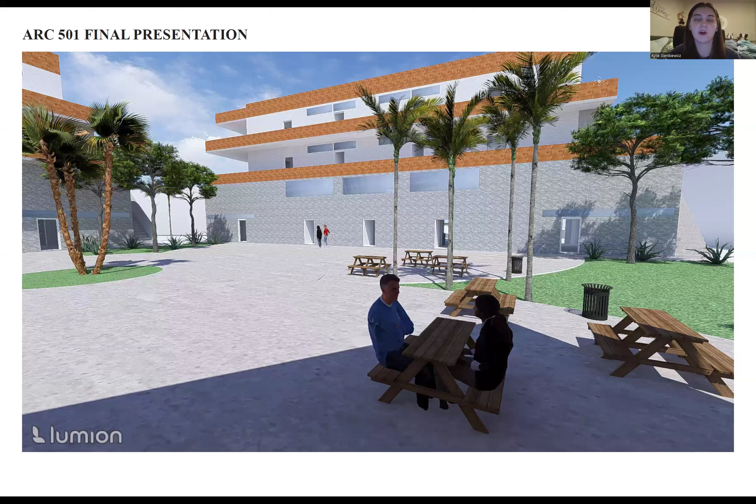Some quick areas of interest that I had in the studio, and obviously links to the studio interests as well, are urban development and housing, and then within that category, the impact of redlining and gentrification on local communities, strategies for equitable urban planning and affordable housing, food security and resource access, and then that is a whole other category of interest for me. Solutions for providing access to healthy, affordable food in underserved areas, community-led resource sharing and support programs.

And then for me, I did a lot of research on the culture in the area. And when I think of culture, I always think of food. So my big one was cultural identity and cuisine. So, how traditional recipes and cooking methods can reflect cultural history and values, and the role of food in maintaining a sense of identity within gentrified or displaced communities.

So that leads me into the top 5 points of my research. People in the area need better access to food and other basic sources. Transportation and safety are not good enough in the area. Education for young people is highly valued. There's a large gap in the area between the rich and the poor. And my biggest one was the community has a strong culture, like there's a lot of creativity and art.

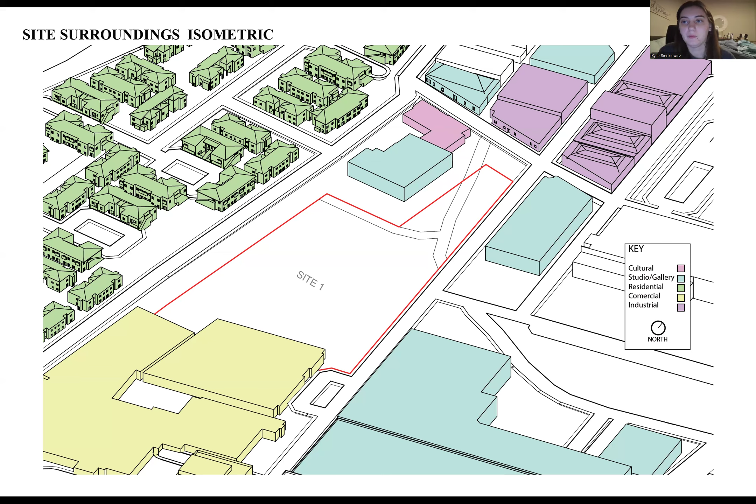And then the blue ones, this one, this one, this one, those are studio and gallery spaces. So lots of art going on in the area. And then this building right here is a cultural market actually. So that is a big point for my idea going into this.

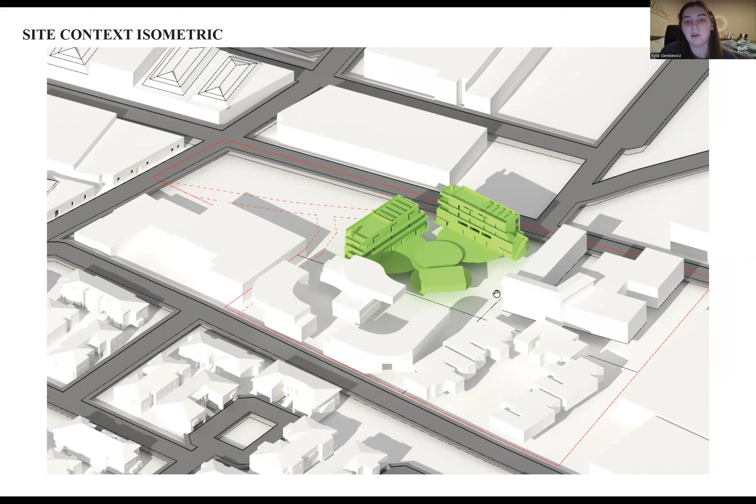Here is the site context isometric. So again, the red line is our site, and then this green building right here is my building, and these three buildings are my group members' buildings.

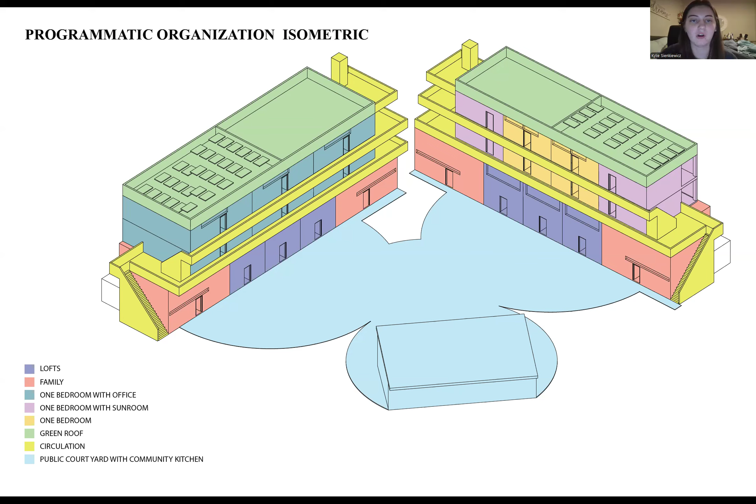Here is my programmatic organization isometric. So I just have each of my different apartment unit types labeled, and then I have the public area with my community kitchen outlined here, and then I have my rooftops with my solar panels and my community garden spaces, also known as a green roof.

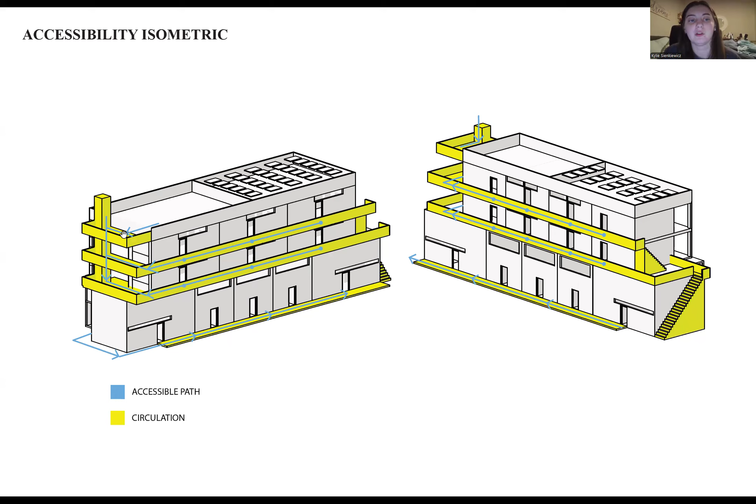And then here is my circulation isometric, so these yellow areas are the areas that would be used for circulation. And then I have outlined the accessible path to get out of my building. So over on this side, we have an elevator, the other side is stairs. So obviously an accessible path would have to go down the elevator. And then the parking area is back here. So they would come down, go around here and over to the parking. And then again, the path of egress would be down the stairs on this side of the building.

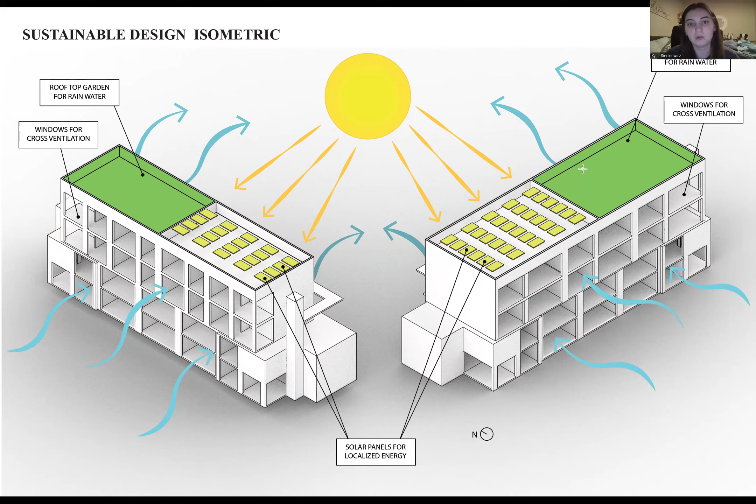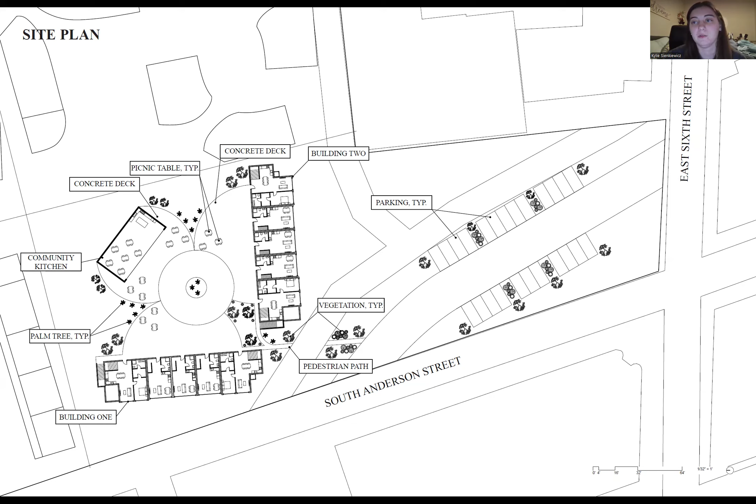Going into this, I talked about this cultural market over here that has different types of foods that are culturally significant to the area. There's a very large Hispanic population in this area. So my idea was to have the community kitchen where there can be events, lots of food serving, and then I was also thinking with all those galleries around the area that there's probably a lot of art events, and that maybe this could be incorporated into that, where there can be food and a place to sit and stuff like that.

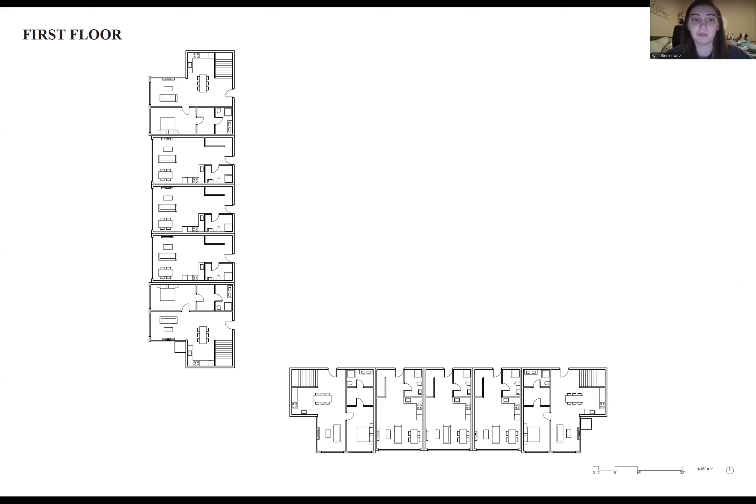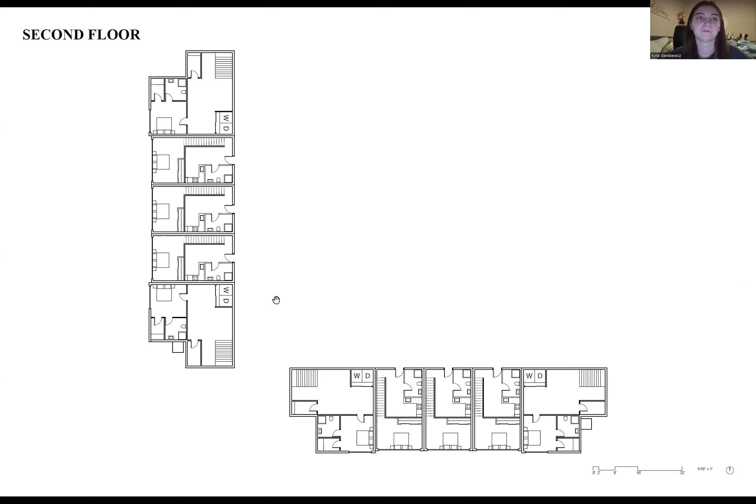And then here is the second floor of those two-story units and the second floor of the building. So again, on the corner, here's that second bedroom upstairs. For the lofts, just the bedroom is upstairs. And then the third and fourth floor of my building are exactly the same. It's just that each building, the floors are different.

So on this building, which is building one, on the corners I have these one bedrooms that have sunrooms attached to them. So they have floor to ceiling windows on both sides of the room. And then in the middle over here, it's just your regular old one bedroom, nothing extra special about it. I was thinking it was more for maybe an older person or somebody who doesn't want a lot of extra space to take care of.

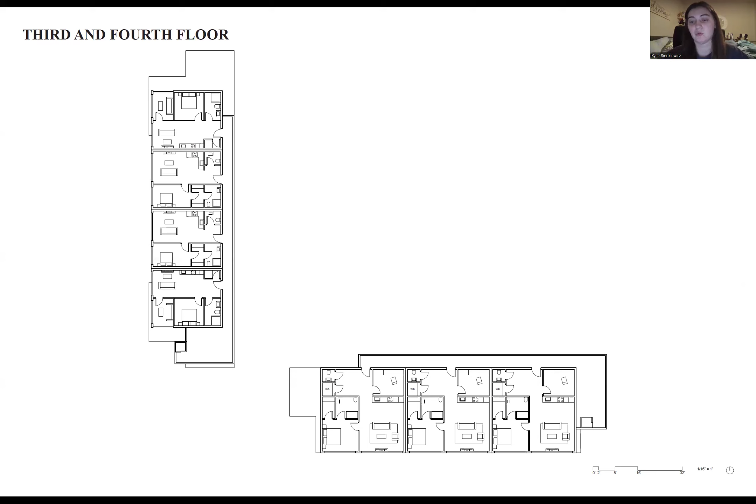And then on building two, I have either a one bedroom with an office space or a two-bedroom unit that is only one story instead of two stories. So here is an enlarged floor plan with residential space. I wanted to try and show more than one of the unit types in this enlarged one. So I showed the one with the sunroom and the regular one bedroom.

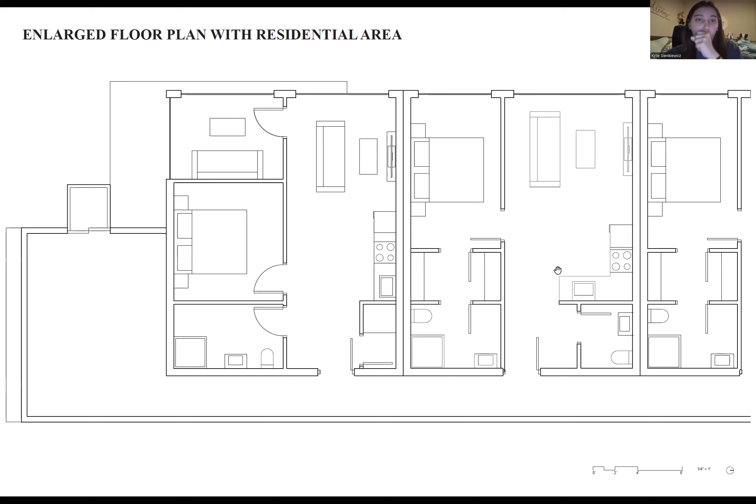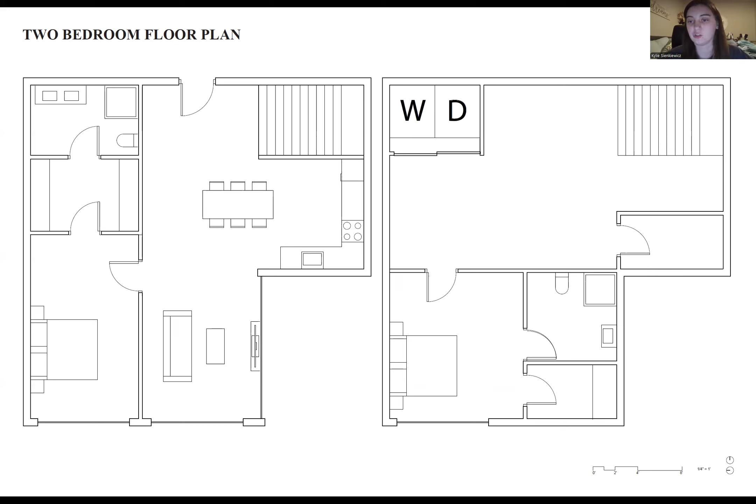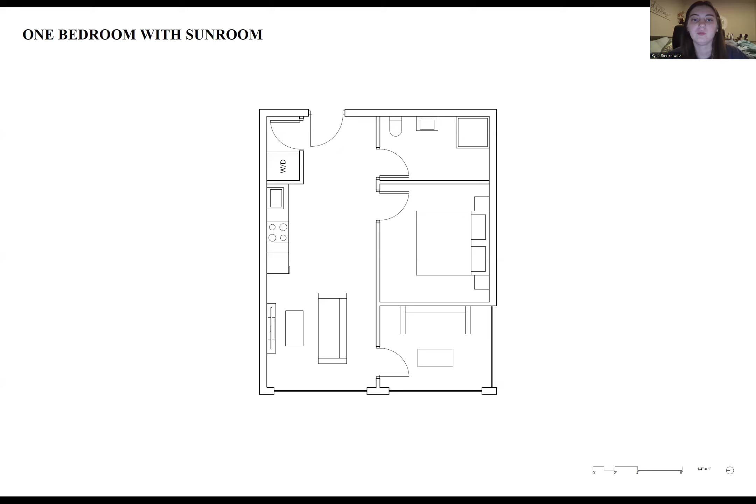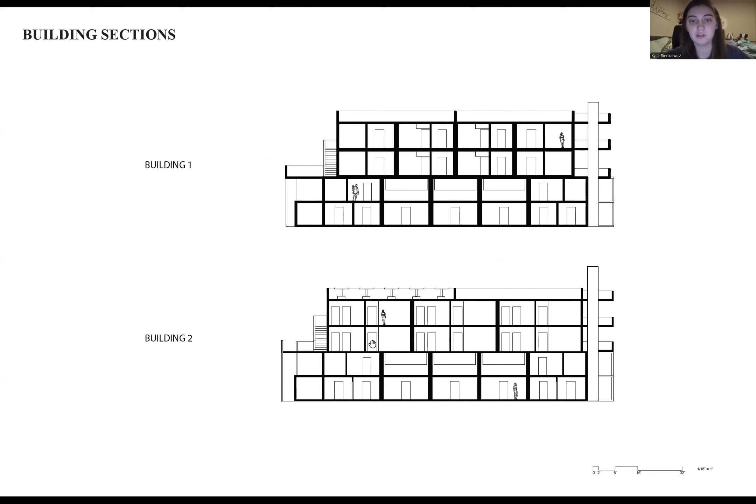And then for plumbing, I decided on a manifold system. There's a central hub that controls water distribution, which allows every apartment to have consistent pressure and temperature. And then I decided on a vacuum sewer system because some of my pipes did have to bend a little bit, because my bathrooms aren't perfectly stacked like you normally should have them for apartment buildings. It uses suction to remove the wastewater so you don't have anything sitting in there, because I don't think it could be done with just gravity in this case.

And then for electricity, I have solar panels that are grid tied with a battery backup. So this combines solar panels, grid connection, and batteries. The batteries just store excess solar energy for use during outages or during the nighttime.

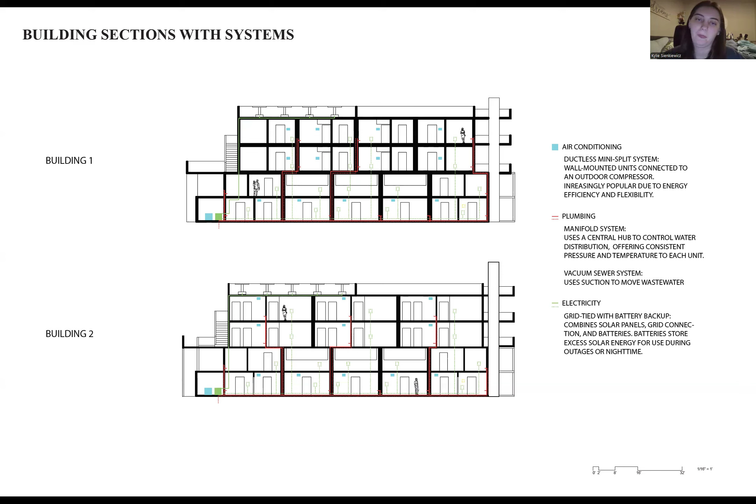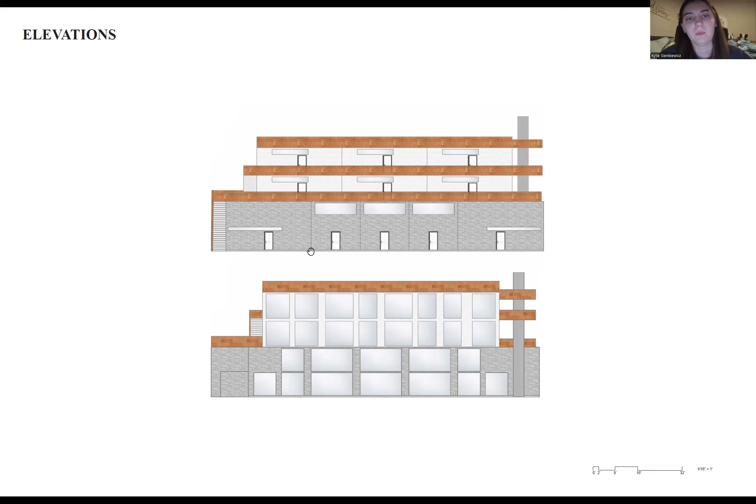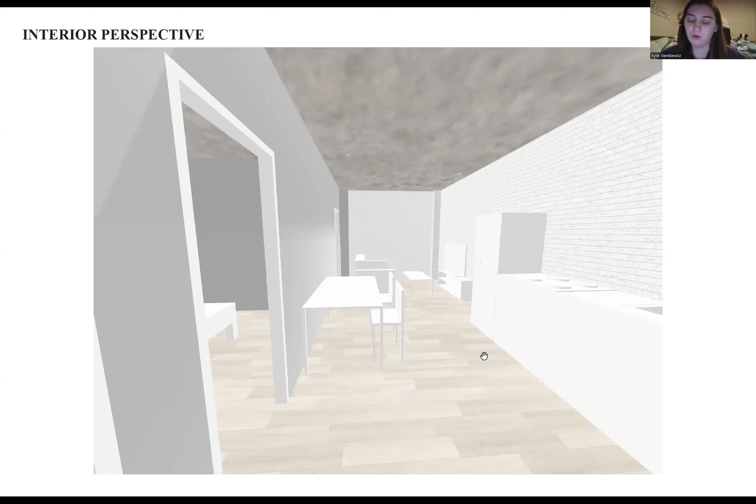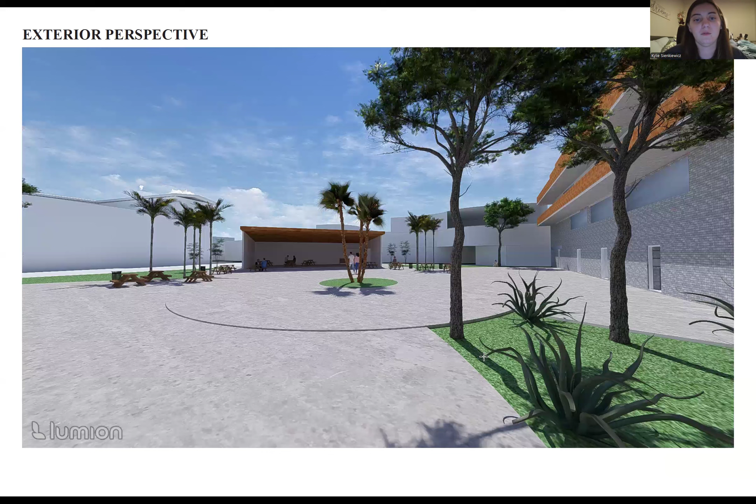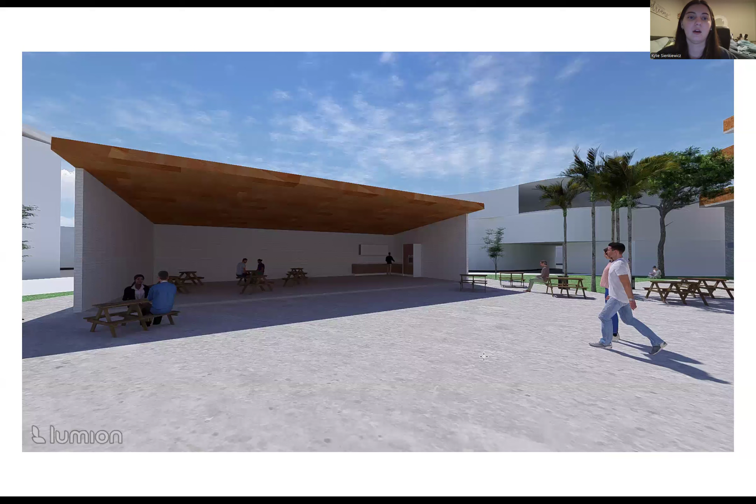Here is one of my exterior perspectives. I have a few of these. This one is from standing inside the outdoor community kitchen area, looking at the buildings. This one is where you would walk in from the parking area, looking at the community kitchen. This one is also from in the kitchen, more angled towards just one building. And this one is a closer look at that community kitchen.

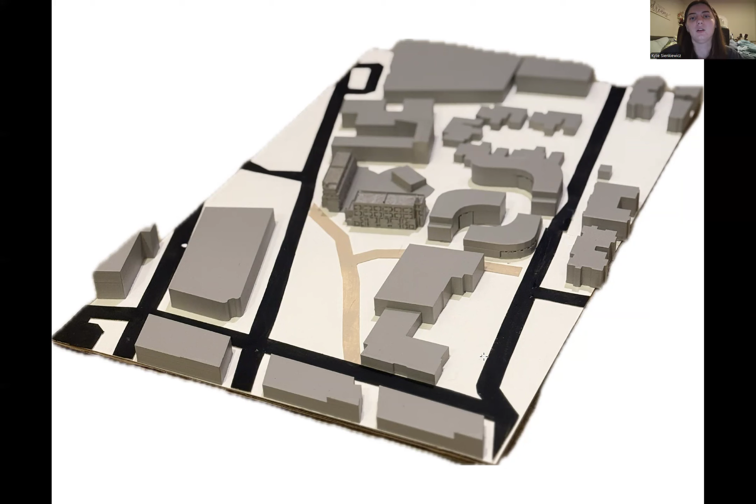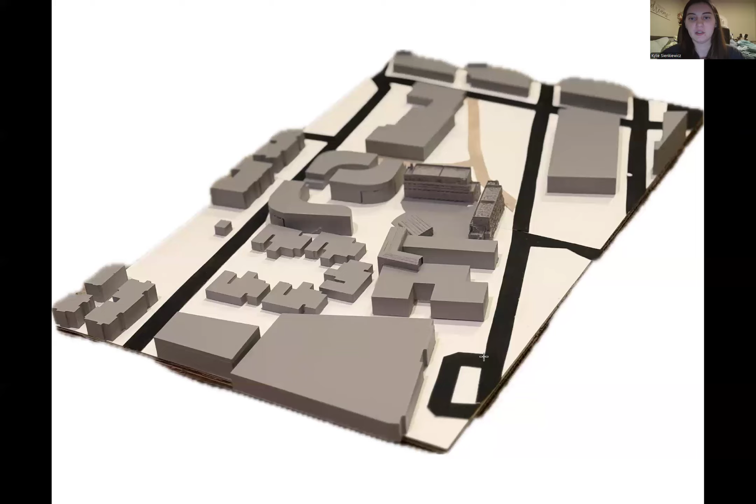And then here are my model pictures. So here's this one. This one is the northwest one. This one is the top down. I doubled up. This one's looking south, and this one is looking southwest. The last one was southeast. And that is my project.